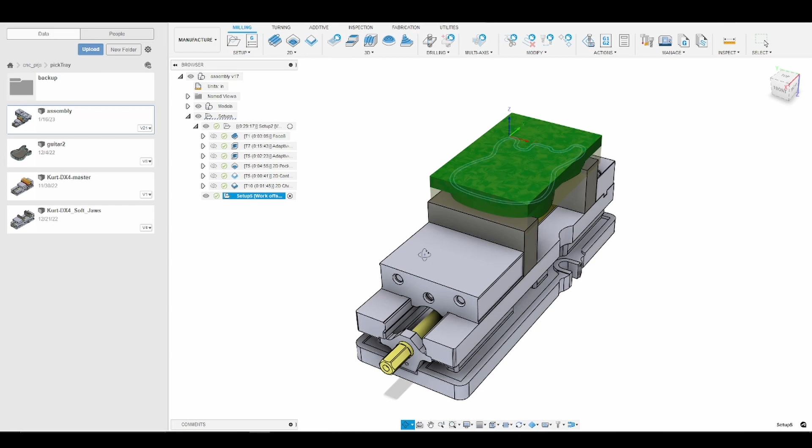Welcome to part 7 of the guitar pick tray series. We're going to go ahead and jump into operation 2. So to do that, I'm going to click on my setup. Fusion 360 will automatically adjust the view. And as you can see from the green stock, Fusion 360 is smart enough to bring over our model with the stock left for Op 2.

Okay, I'm just going to orbit over here and go to the left-hand view because I want to emphasize that our work origin, or our probe point in my case, because I'm using the Tormach passive probe, is going to be on the fixed jaw side of our vise, and we are going to probe our soft jaw. I'm using the back left corner. You could use the inside corner if you want. So we're going to probe first and then put our part in the vise and tighten it down. Okay, so now let's go back to our home view.

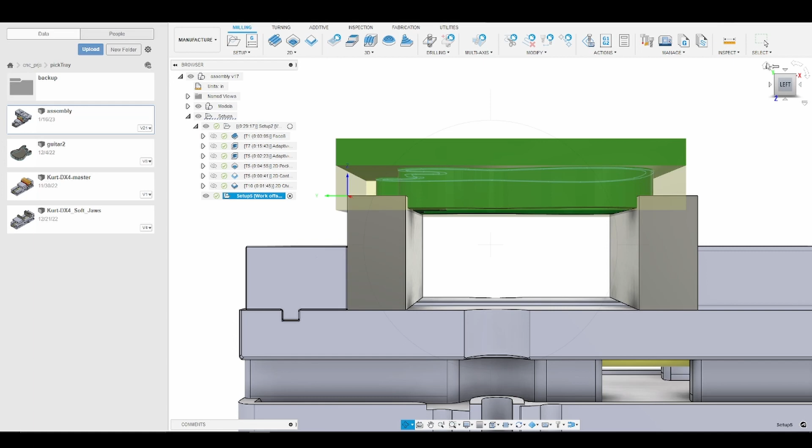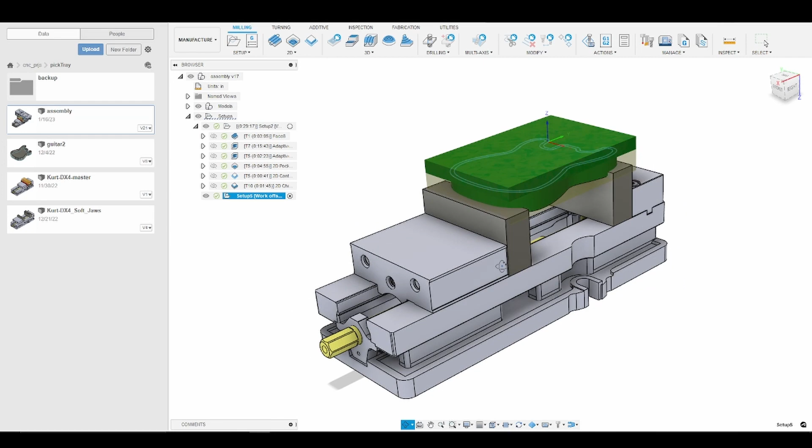And what we're going to do now is select a 3D adaptive clearing, and we are going to try to remove most of the material that is left over. So you can see this large chunk of material that's usually referred to as a hat on top of our part, so we want to remove that hat material. So again, I'm going to go to 3D adaptive clearing. I'm going to select the tool by going to my local Tormach library. We are going to be using the Gorilla chip breaker again.

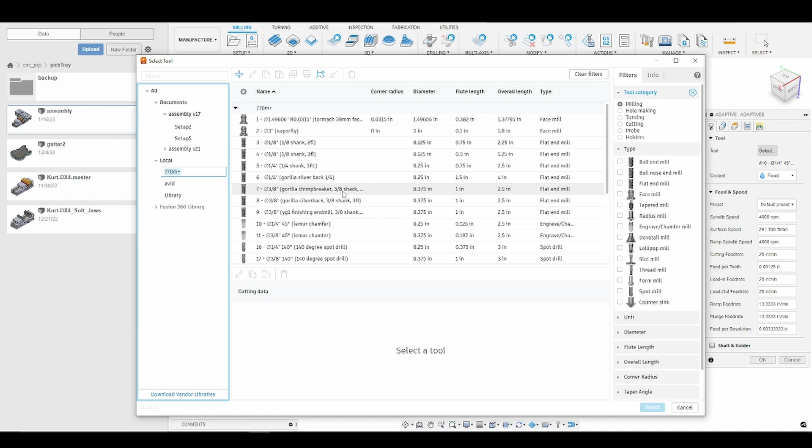That's a 3/8 tool, 3 flutes with chip breakers, so that our chips, when we're roughing, are finer. That means you won't get chip buildup. The flood coolant will push it away. And it also relieves some tool pressure so we can move faster than if we were using an end mill that didn't have those chip breakers. So I'm going to go ahead and select that. Our speeds and feeds, so we are running at 7,500 RPM, 60 inches a minute with 2.6 thou per tooth.

Because we are using a 3D toolpath, Fusion 360 again takes our geometry into consideration, so we are going to jump over the geometry tab and go to heights. Now we are on the back, so we do have our stock above our part, so we want to make sure that our top heights are still set to stock top. However, our bottom height is wrong. It's set to model bottom. And again, we have to remember here, our part has been flipped over, so our model top is now the back. So we want to go ahead and select model top instead of model bottom, and you'll see the blue rectangle moved up to match that.

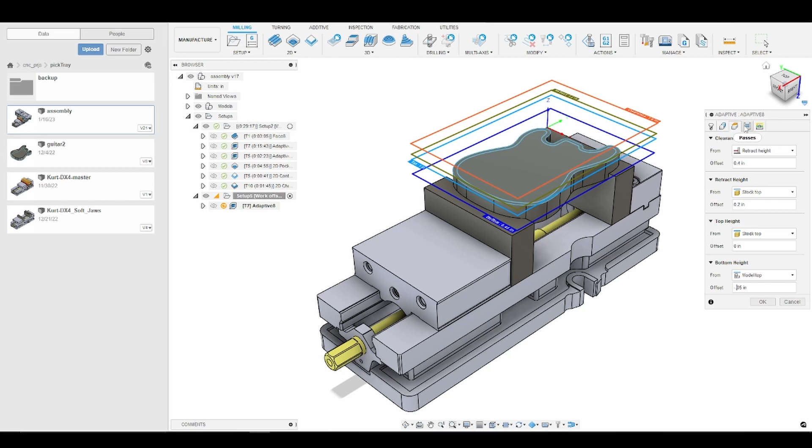The next thing I'm going to do is, because on my first 3D adaptive toolpath I removed an extra 50 thousandths, I'm going to go ahead and match that here. Sorry, minus 0.05. All right. And then we are going to go into our passes tab. And again, our optimal load is the main concern here. For my Tormach, 150 thou is way too much. My rule of thumb, because I am moving so fast, is around 10% the diameter of the tool. I'm going to use 8%, which is 30 thousandths.

The next important fact here is I am leaving axial and radial stock. So what I don't want to do is touch any finished surface, so mainly the walls here that our soft jaws are holding. I do not want to touch that because it will leave tool marks and essentially ruin our surface finish. So we want to make sure that we leave some stock on the side wall here so that our end mill doesn't touch it. But because we took off that extra 50 thou, there isn't going to be any stock there to worry about removing anyway. And we are leaving stock on the floor, or what would be this large flat surface, so we can come through on the next operation and face that off and get a pretty surface finish.

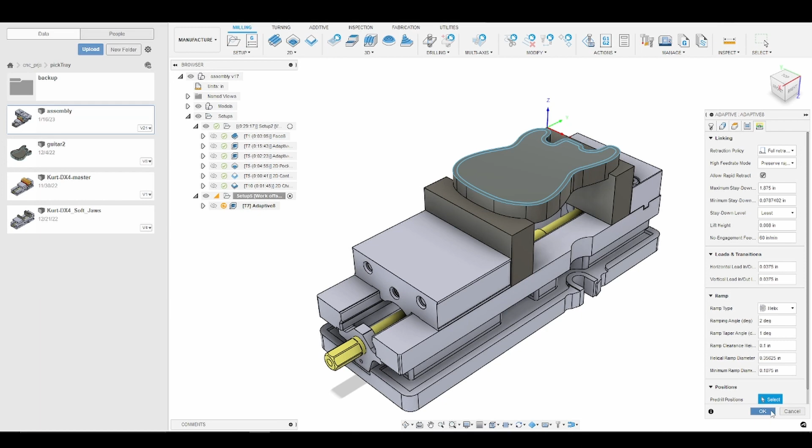All right. And I believe that is everything. Again, always check your stay down level. It defaults to least, so that will reduce any retractions and save us time. So we'll go ahead and click OK. And that should generate our toolpath for us. Beautiful. So we'll right click and we will go ahead and simulate that. Hopefully it doesn't go too fast on us. Nope.

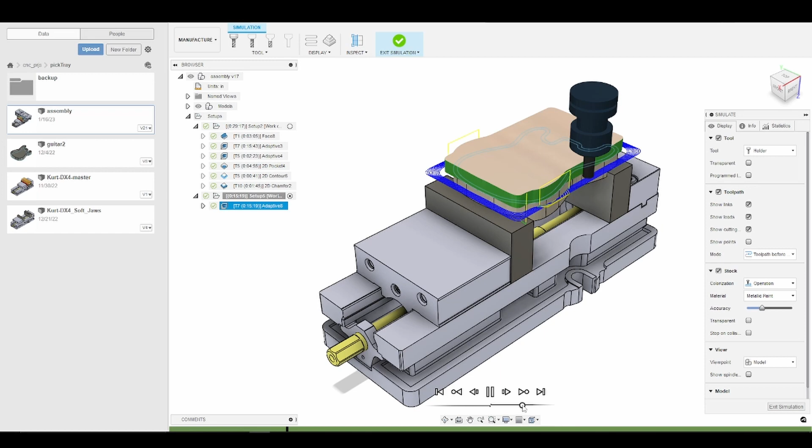And so as you can see, we are just walking around the outside of that top hat and removing the material. I'll speed it up a little bit. You can see the contour of the guitar starting to come into shape. I'll move forward here. Again, the roughing or the adaptive clearing strategy is what normally takes the longest time because we are removing so much material. There you go. That is what the finished toolpath looks like.